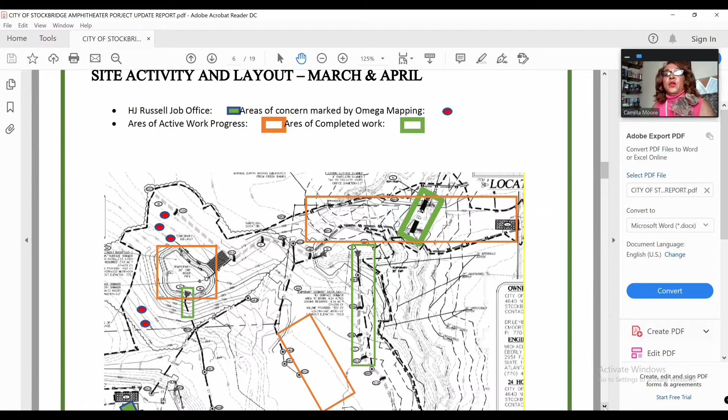I just do that for a couple of minutes and then I'll move on.

Where are we as of April the 22nd? Here's the weather impact days related to grading and drying, how many days we could get out there. The lower parking lot curb, there's a video I will be posting on the website that H.J. Russell provided of the latest progress, showing where the lower parking lot is, which is going toward Lee Street. Some of you may have been able to see it if you've gone by.

That is 85% complete. Subgrade prep for the stone to commence 4/25. Curb and gutter sets to commence 4/27, from the rear parking lot to North Lee Street.

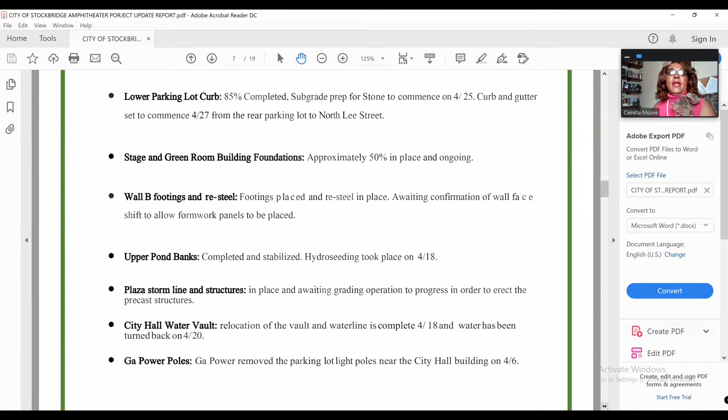Stage and green room building foundation, believe it or not, if you go out there, the foundation is down, approximately 50% in place and ongoing. Once we get the foundation all down, we can move pretty fast because we're going vertical. Wall B footings and re-steel - footing is in place, re-steel is in place, awaiting confirmation of wall face shift to allow formwork panels to be placed.

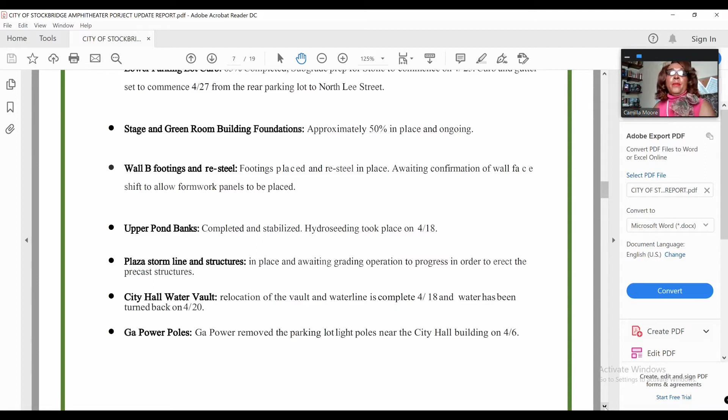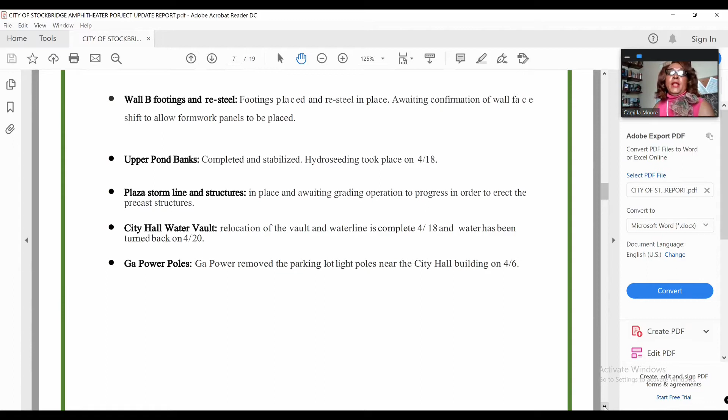The upper pond bank has been completed and stabilized. Hydro seeding took place on 4/18. Plaza storm lines and structures are in place, awaiting grading operations to progress in order to erect the precast structure.

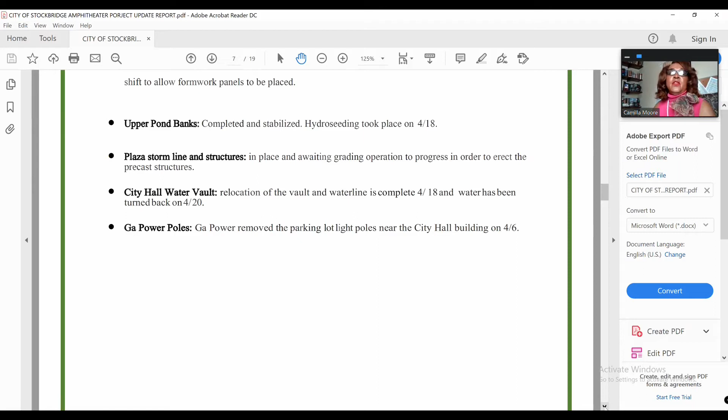The City Hall water vault - we turned off the water, I want to say last week, for about three days so that we could go in and connect the water lines. Relocation of the vault and water lines was completed on 4/18, and water was turned back on 4/20.

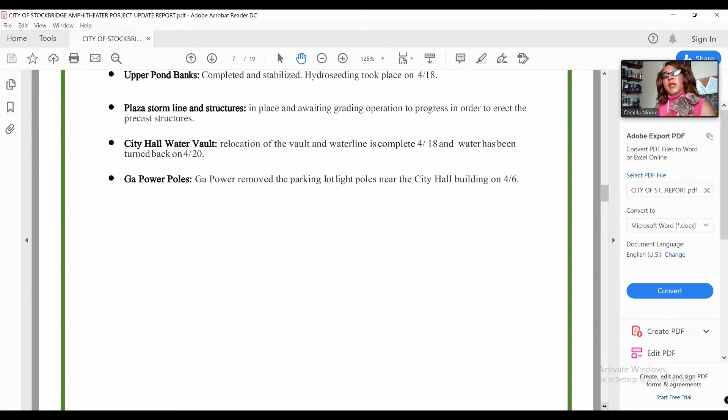There are Georgia Power poles and cameras right by City Hall. You may not have noticed them, but we needed to remove those poles so that the construction could move further back towards City Hall.

This is a graph of the activity and schedule for March, and these are the things that we have accomplished.

The creek crossing, for those that may not be aware, there was actually a creek running through the property, and we had to get clearance from the state of Georgia to address it and make sure we don't disturb the creek. We actually pulled it in as part of our theme as it relates to the amphitheater. So we put up all the walls, ran through the piping, and did everything we needed to do to deal with that little creek crossing.

We finished the roadway grading and excavation of unsuitable soils. For those who may want to know, whenever you do a construction project dealing with dirt, there are some types of soil you cannot build on because they will sink or could be contaminated. Those are called unsuitable soils, and you can only build a structure on suitable soils. So in areas where we found unsuitable soils, we had to remove them and replace them with suitable soils.

The primary pond, we're moving ahead. We started out thinking we would only have one pond, but due to the topography of the land and making sure the water sloped properly and complied with how water flows into our water system, we had to go from one pond to three ponds. But I think at the end of the day, it's very pleasant looking because it creates a passive park for us.

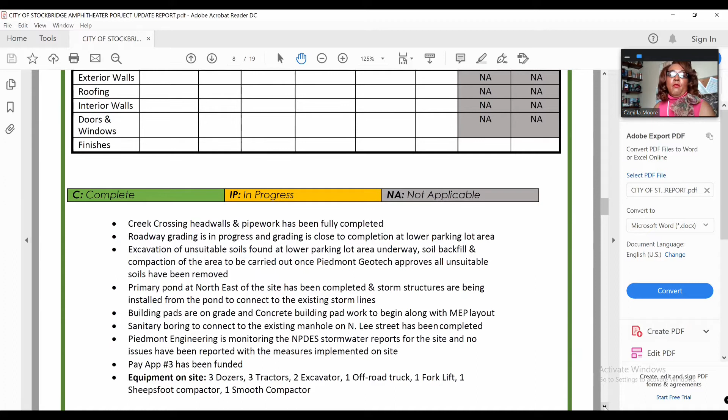These are the equipment on site. So as you go by, you will see larger equipment. We have 3 dozers, 3 tractors, 2 excavators, 1 off-road truck, 1 forklift, 1 sheepsfoot compactor, and 1 smooth compactor. Those are the equipment out there for the public if you ride by.

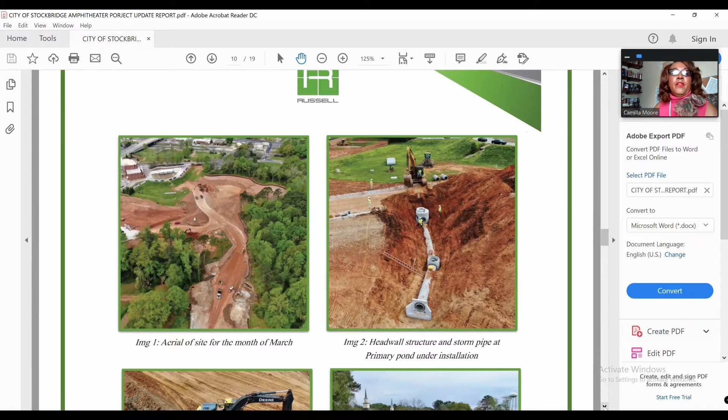And these are the aerial photos. I started with the most recent so everybody could see. This is the aerial of the site from the month of March, and as you see looking down, it really does look great.

Image 2 is the headwall structure and storm pipes at the primary pond under installation. You can see how big the ladder is, which really lets you know how big those pipes are. I mean, really, you can walk through those pipes, they're that big.

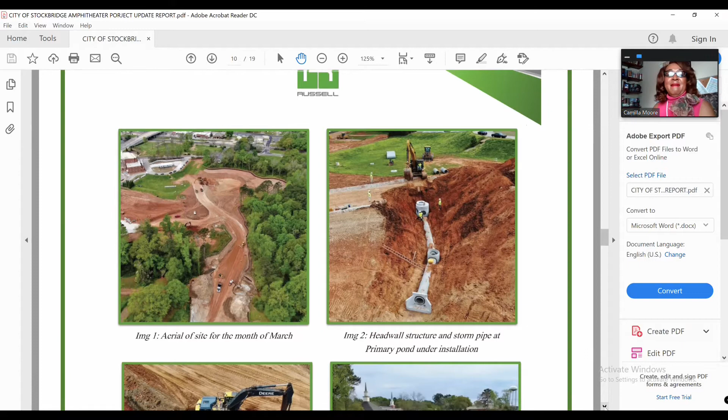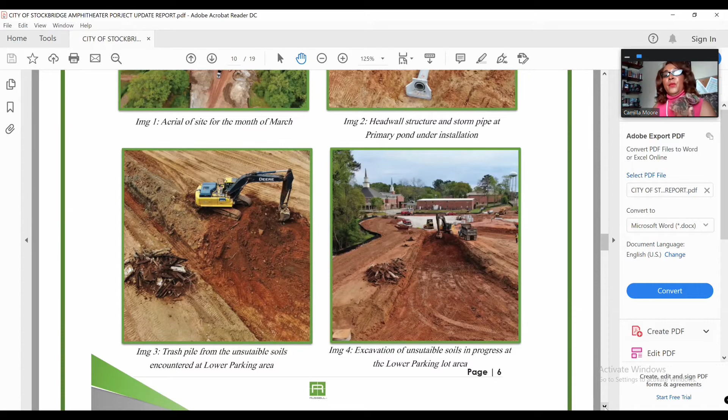The next shot is our trash pile from the unsuitable soil at the lower parking area. Image 4 is excavation of unsuitable soils in progress at the lower parking lot. As you see, we have to remove all the soil that's unsuitable and replace it with suitable soil.

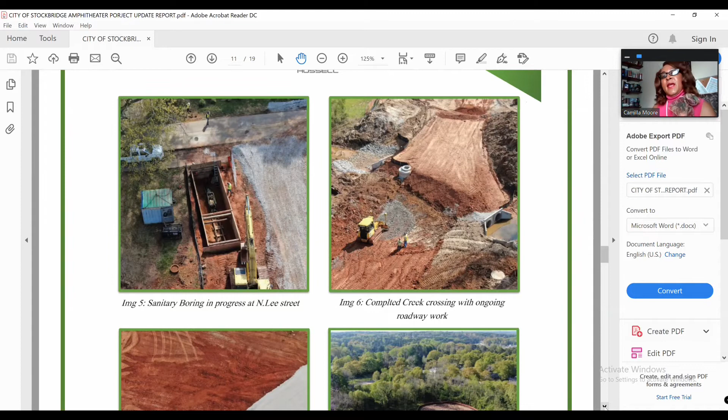The next two shots are the sanitary boring in progress at North Lee Street. Image 6 is the completed creek crossing with ongoing road work. As you see, we have to protect that creek and stream, and that's where we're addressing it.

Here is the building pad for the stage and green room in progress. Now you see that is the first stage of laying the foundation for our green room and the building pad. Image 8 is primary pond completion.

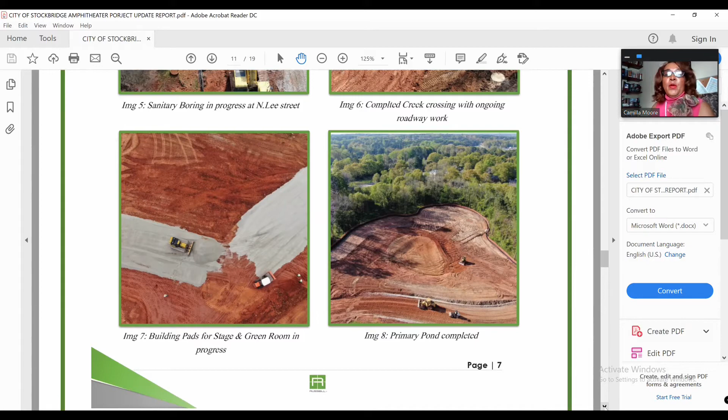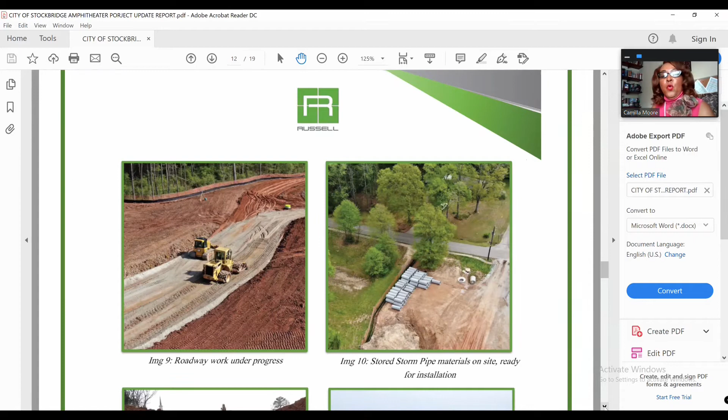Those are the most recent. I think these may be the last two of the most recent: roadway work under progress, storm pipes, and materials on site ready for installation.

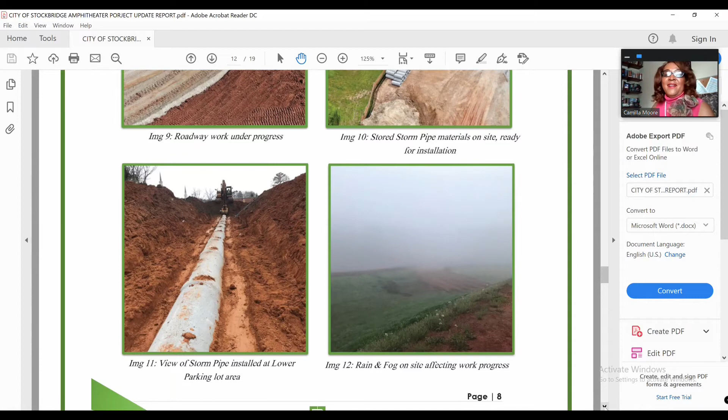View of storm pipes installed at the lower parking lot area. And then, of course, I thought this was great - he got a shot of the rain and fog on the site affecting work in progress. So needless to say, that day we could not work.

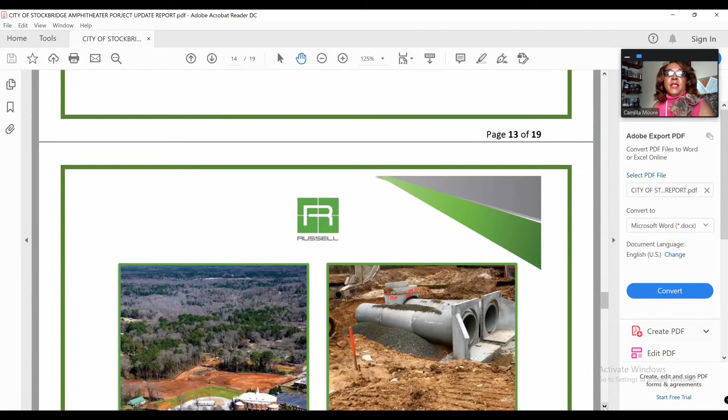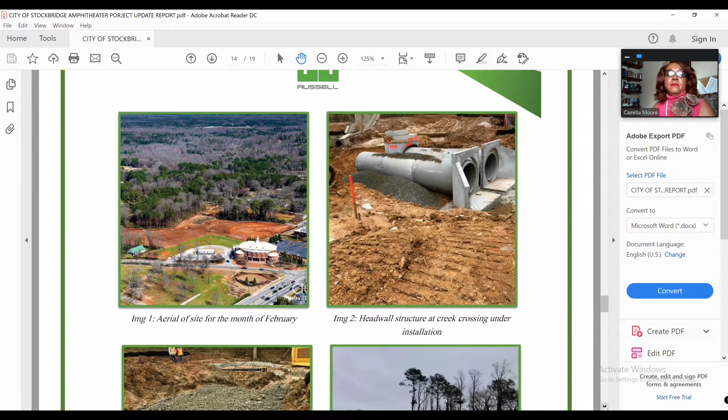Those are the most recent. These are just shots from February to show some ideas - that's the area of City Hall and the construction behind it. This is the beginning of our work at the creek crossing. This was our stone base installed before placing pipes, showing the movement of dirt and site prep to get everything ready.

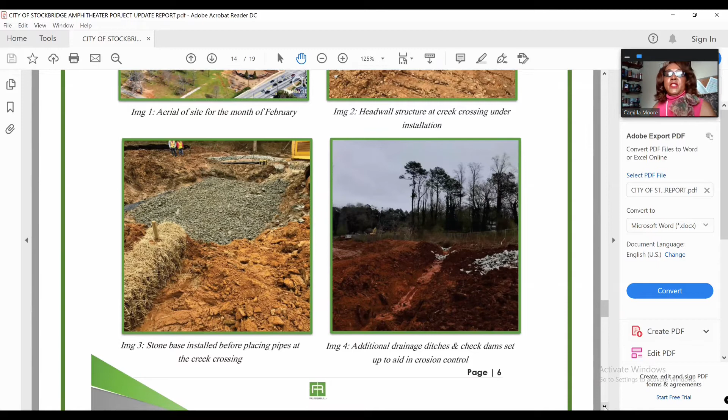This is the additional drainage ditches and check dams. This is what we had to do to make sure we actually mitigated any additional erosion that may occur from the site.

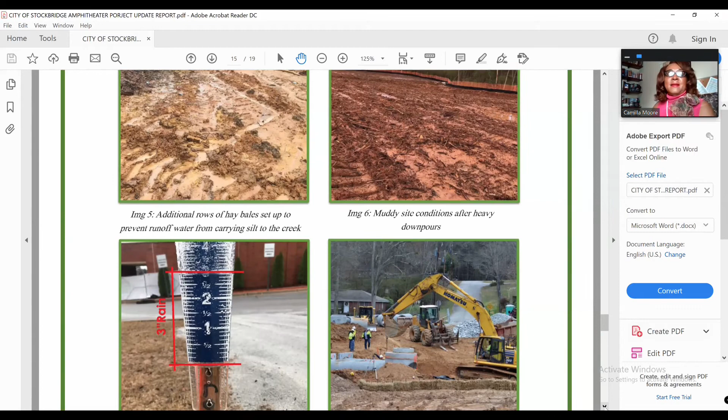And of course, this is just what it looked like on a lot of muddy days. We got a lot of rain. We thought these were funny. This is a gauge of how much rain we actually got in February. It was quite a bit.

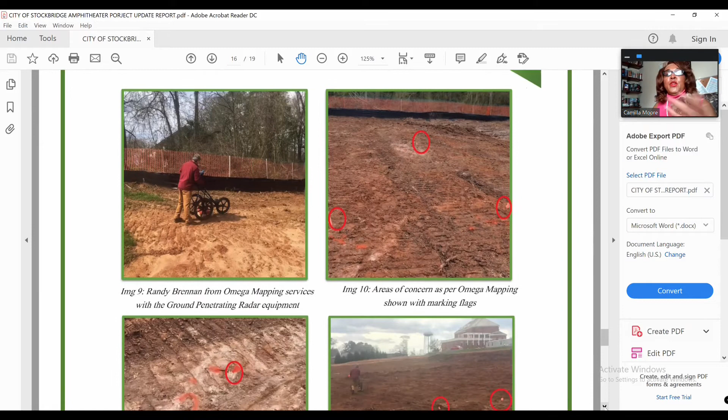We lost a lot of days. And then these are pictures for those who want to know whether or not the city did their due diligence in terms of checking for possible burial sites. I just threw these in so people could see what the machine looks like that actually rolls over to see whether or not it detects anything.

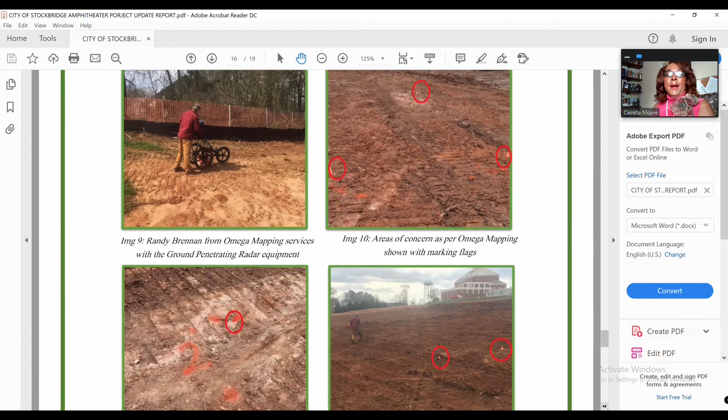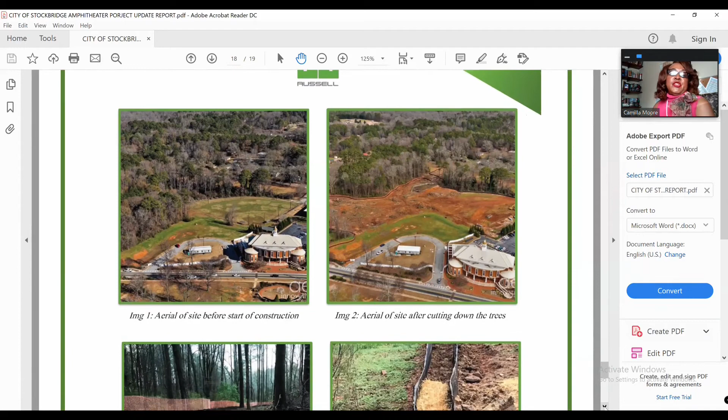And these are the sites and the markers that were marked for the archaeologists to come in and see whether or not something was there. And these were the first shots at the beginning. As you can see, not a lot done. Everything was pretty much in place. We were just beginning construction, and those were early shots.

And that is the end of this brief report. If there are any questions, I'm available to answer.

Well, yeah, one second please, sir, if you don't mind. I appreciate the briefing, Camilla, and I'm pretty excited. I'm pretty sure everybody else is pretty excited about the progress here and how things are coming along. Can't wait till this is done. But anyway, on that note, Mayor Pro Tem Thomas, go ahead, please, sir.

Yes, great report, Mrs. Moore. I didn't count how many pages. I'd like to get a hard copy if that's available. Is it online? Maybe I could get someone to make a hard copy. I can actually email this and make sure that a hard copy is in your box for you to pick up. I can do both.

I appreciate that. Can you speak to the directive as far as the consensus for the house on East Atlanta Road? I know you put something out, getting council opinion. So what's the final decision on that? You gave a final decision of actually tearing it down. And so therefore we are in the process, once we...

Complete our investigation of a possible burial site, which is in that same vicinity, then we're gonna move forward with demolishing the existing house. We've talked to TSW, we're in the process of actually drawing the renderings for the new ticket office and where that new facility will sit. It will actually sit at the internal street at the corner as you exit out going on East Atlanta Road. So that information is being provided and I will provide that.

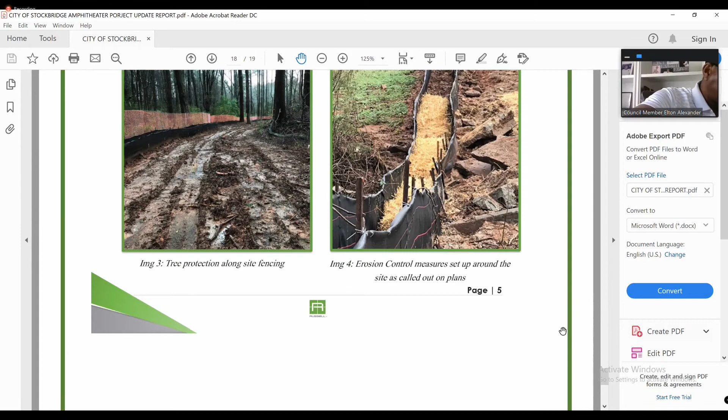Outstanding. Anybody else comments or questions for Ms. Moore? Yeah, Mayor. Go right ahead, sir. Ms. Moore, can you hear me? Yes, yes, sir, I can. I had spoken to you and Mr. Knight previously about, and it's not on any of your pictures, but could you just speak briefly to...

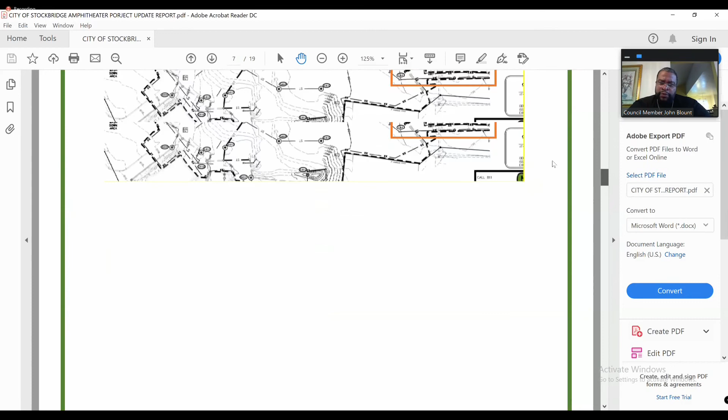What's going to happen about the beautification? I mean, we can call it beautification, but the aspect of aesthetics and the look that we're going to be putting in the community right behind the amphitheater. That we're not going to just build this amphitheater and leave that community high and dry, that we actually have some stuff put in place to help beautify that area back there.

That's correct. The landscaping plan for this entire site, because we're actually doing widenings on both Lee and East Atlanta, calls for a landscaping plan. So there will be landscaping as citizens and residents go down Lee Street as well as East Atlanta. There will be landscaping on both sides all the way down those roads. So those streets will really be beautiful. In addition to the change of lighting, lighting on both of those streets will be consistent with what we have around City Hall. So the way Lee Street looks today, it will...

Get a total makeover. And then East Atlanta will get a total makeover. And both of those streets will be beautiful to accent what we have on ground as it relates to the amphitheater itself. Thank you. Councilman, if I may, Mayor, as... to Councilman Blount's point, as Ms...

Having the gateway into the amphitheater off of Lee Street is very key to this project, as people enter into that area, but also for the people who live there on a regular basis. There will also be significant buffering along the backside of the amphitheater project adjacent to the residential homes.

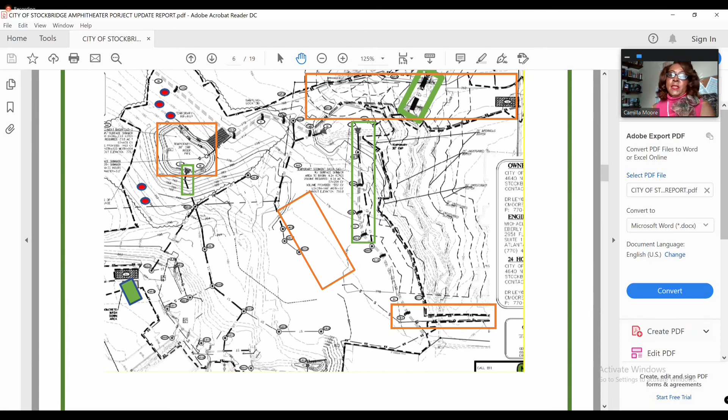What we did, as you know, we have one wet pond and two dry ponds. So the wet pond is actually going to be a passive park, just like the city manager said—a park in itself, right adjacent to City Hall for people to come and enjoy. There were some questions some time back about having a very nice passive park somewhere in the area, and this particular location will be it. We're working on finalizing the design, but it's really going to be a beautiful park.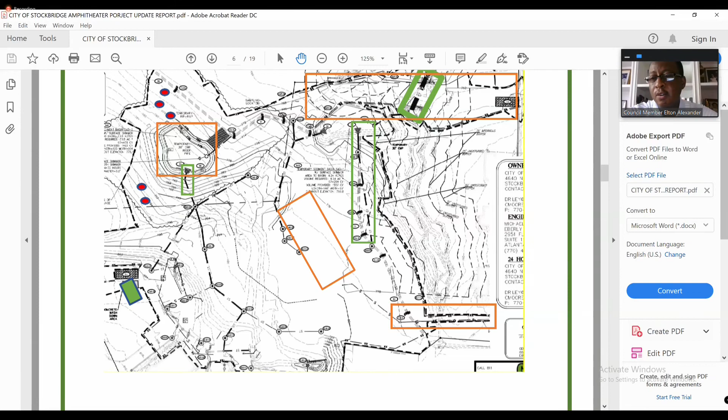Any other questions for Ms. Moore at all? Yes, go right ahead, sir. Ms. Moore, thank you so much for that presentation, it caught us up. Will you expand upon that and let our citizens know about the road improvement project attached to this, which is East Atlanta?

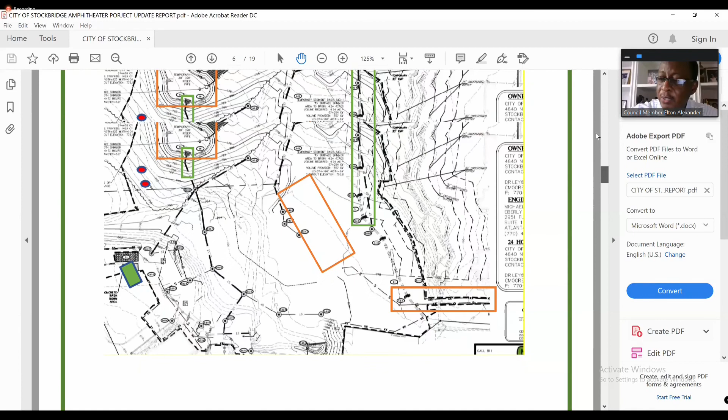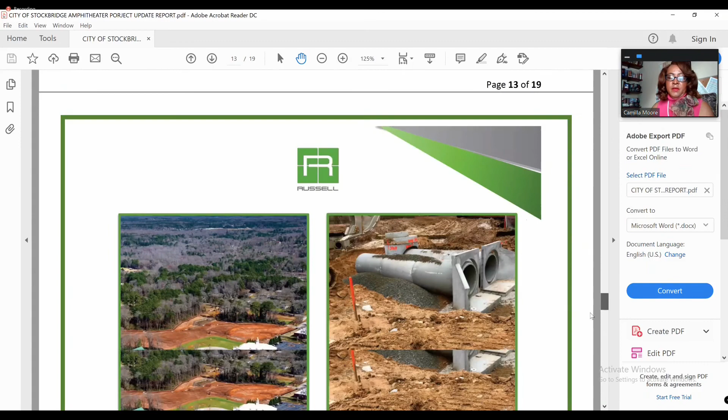We'll be correcting the bottleneck there with a turn lane. I was going to try to find an aerial that could pick that up. Because of the number of citizens that will participate in the amphitheater, GDOT wanted to make sure that egress as you get in and out would be improved, such that traffic would not be impeded, nor would harm come to the subdivision at the rear.

So on Love Street, they are requiring us to align that street. Right now you've got to stop, you've got a light, and it's not a straight intersection. We have to realign that street right at Love Street, and then put in an additional turn lane that runs all the way back to the entry into the parking.

Depending on the direction, that additional lane could be used as an entry or exit point—coming in, we use it to get traffic in, and on the way out, we use it to move traffic out. It will be a straight-through lane as well as a turn lane. Then on East Atlanta, they did require us to widen it as well, adding two lanes so you have a lane to continue straight through the light, as well as a right turn lane.

That allows you to turn right onto 138 North Henry. So the traffic plan as it relates to road widenings, which will mitigate traffic getting in and out, is a very good one. We think that once it's completed, even with as many as 4,000 people in the place at one time, getting them in and out will be very easy based on the traffic mitigation plan currently before GDOT.

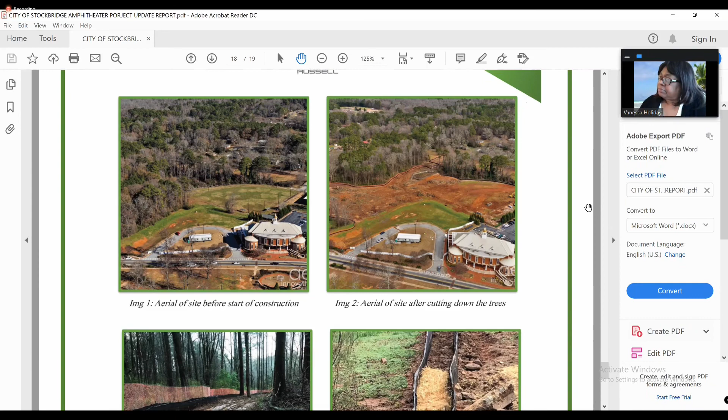Okay, so you need a copy—you don't need a motion for that, just a copy is what you're talking about. I think it was stated that there was something, so I would need to receive that as well. I think it was done by email, so I will get those together for you, since Mr. Knighton asked for consensus. Great, thank you. And they responded to both, and their response is by email.